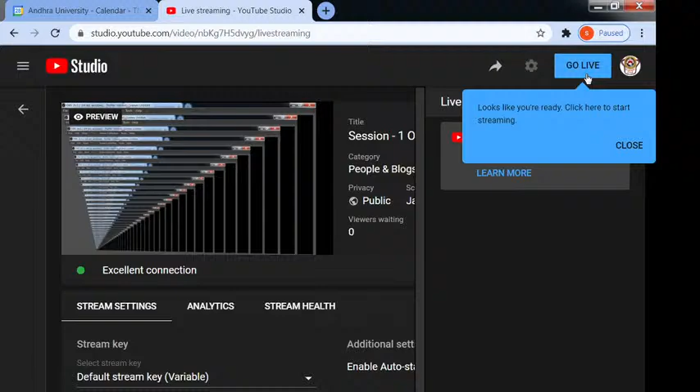They are expressing their happiness and requesting you to go at the same pace, sir. They are able to follow. Okay, fine then, thank you. That's the most important. Good, sir, I'll stop presenting so that you can share your slides.

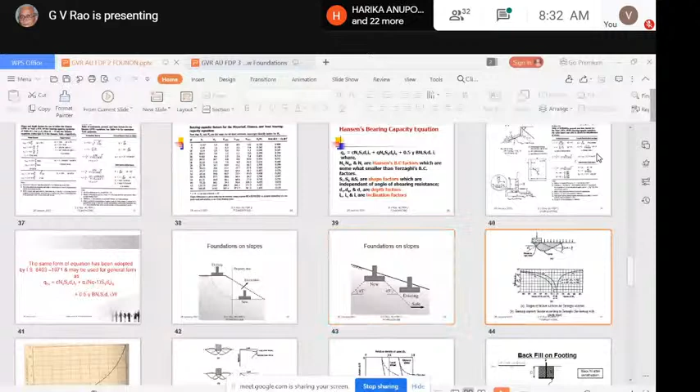Are you able to see my screen? Yes sir, it is visible. Okay fine. So tell me when to start. I'm ready. Maybe 30 are there, sir, we wait for another 3-4 minutes and then we'll start. Yeah, that's fine, okay.

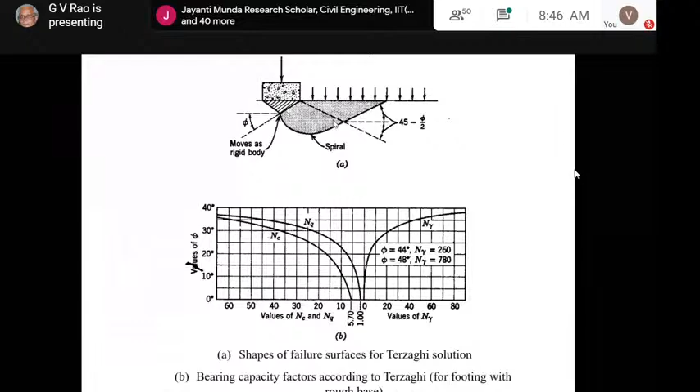He has also used an inclination for both these lines, the linear part defined at 45 minus phi by 2, because that is the way the failure planes behave in passive condition. This is a passive wedge. So that's why both these lines are defined as 45 minus phi by 2, and this is assumed as parallel.

We also got solutions for a rough foundation and a smooth foundation. Now, by basic work, the rough foundation gives more bearing capacity, while a smooth foundation gives slightly less bearing capacity. Once you get the result in Terzaghi's standard format, this is the original form, of course.

What is most important for us is the change in values of N gamma, N Q, and N C. In the beginning, up till about 15 or 20 degrees, which are not realistic, very loose conditions apply. But if you go around 30 degrees angle of friction, we see it almost goes up so high. The difference between angles becomes very small, but the increase factor becomes tremendous.

That is most important: assessment of the foundation subsoil condition has to be very precise, because between 29, 30, 31, and 32 degrees, there is so much difference in the N gamma factor. You can see it moving up sharply. And this is only up to 40 degrees on the curves.

For example, at phi equal to 44 degrees, N gamma is 260, and at phi equal to 48 degrees, N gamma is 780. Just a mere change of 4 degrees gives more than double, 3 times the value. So that is the kind of appreciation we need in getting the correct assessment of the foundation subsoil conditions.

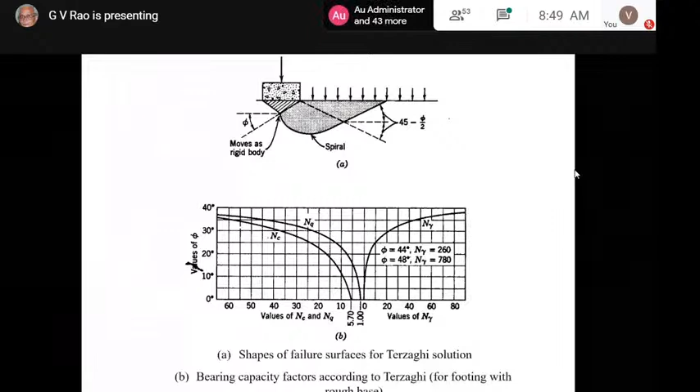That's why I thought I would emphasize it now. The other important factor, which will come to mind by common sense and will be used later, also comes out of Terzaghi's interpretation. I don't know how many books give it, but I picked it up from my old copy of Leonard's Foundation Engineering.

So on this horizontal axis we have the value of angle of friction phi, and on the vertical axis we have depth over B, depth of the foundation over the width of the foundation. What we're finding is that the zone of influence is going to be up till B only for 30 degrees angle of friction.

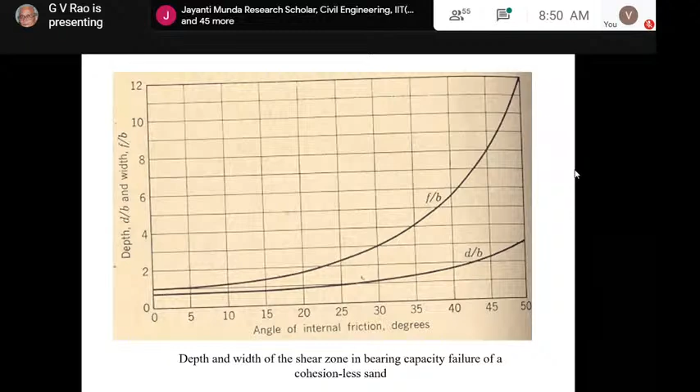And if the angle is going to be more, naturally it's going to increase. With the depth or D over B increasing more, this value is going up to 2. At 45 degrees it's becoming 2. That means the depth of the influence zone is becoming larger and larger for higher angle of friction.

That's why we consider influence zone for capacity calculations. That zone of influence comes from this basic theory. It could vary - for 30 degrees angle, sand, we can say about 1.5, 1.2 or something like that. It's actually moving to higher angles like this, up till 2.5.

So this value is about 2.5 roughly. That is the zone of influence which we get directly from this theory. It is, I should say, easier for us to comprehend this than getting the total Boussinesq bulb and things like that, because this shows you what is happening near the surface.

The other point is what is the width of this zone. If you recall my previous picture, it shows you that F is the value of the upheaval of the foundation soil onto the ground. So that width is taken as F from each side - one side F and other side another F. So 2F is the zone of influence totally.

For example, for 30 degrees, the zone of influence is, let's say, 3. That means the zone of soil participating in load transmission through the passive wedge, or passive zone, is about 3 times the width. And this moves further, going up and up. So the more the angle of friction, the more soil participates, that's why the bearing capacity increases.

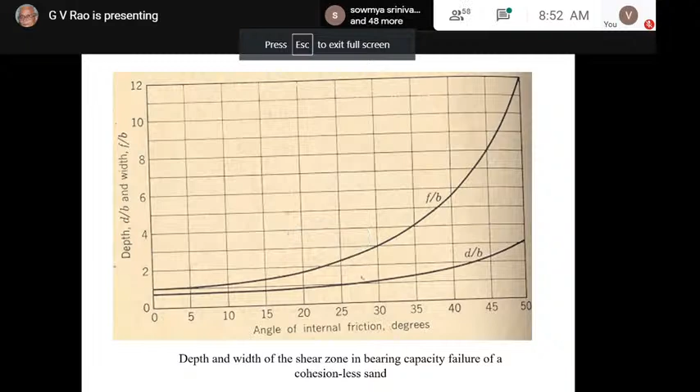Tomorrow, when we talk of improvement of the ground, this is the zone we are always considering. So both in terms of width and depth, higher the angle, more the zone of influence. More zone of influence means that much soil is participating in the load carrying capacity. In fact, we use it extensively in pavements also - when you put geosynthetics in pavements, we understand the importance of this very clearly. So for shallow foundations, one ought to know this zone of influence. Okay, this defines the zone of influence from a depth and width viewpoint.

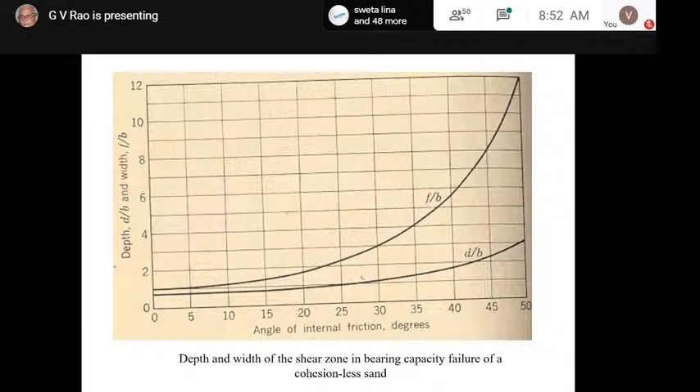So the other thing I didn't show you earlier, in terms of basics, we initially defined local shear failure, general shear failure, and the load deformation curves, load settlement curves, like a plate load test. When you have general shear failure, we've already seen the entire zone is influenced. The width is what we're talking of here, and the depth we're talking of this. So we are likely to get something like this - the plate test values will be definitely quite steep, and then maybe it will fail or go down slightly.

And if you take only local shear, you can see this. Last time I showed you a picture wherein there is a dotted line here, dotted line here. Now here everything is a dotted line. That means it's not going to form fully, but it will show some tendency.

That is local shear failure, in which the soil just below the foundation participates in the load bearing. The zone of influence becomes lesser because it's punching down, going down only without really moving the soil by the wedge on either side. It does not allow us to fully form the passive wedge, which would be the zone of influence or shear zone.

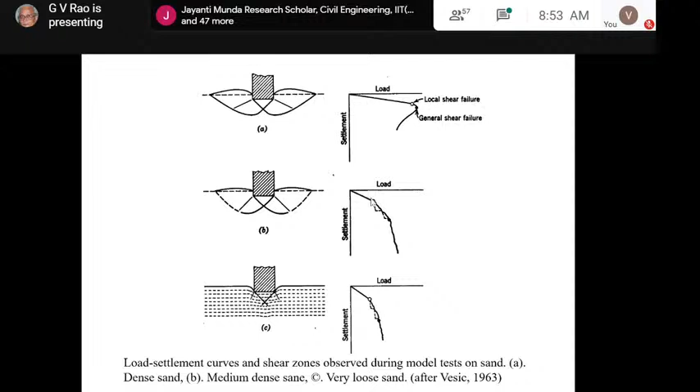Another way to look at it: the foundation will simply go down completely. It may partially form the wedge, but it's simply going down now. That means no soil around is going to be influenced, or very little influence. Only the soil just below the foundation is going to be affected.

When the zone of influence is less, when the soil adjacent to the foundation and deeper is not influenced, what's going to happen? The curve is going to get steeper, meaning failure is very imminent very quickly. This is what we call punching shear.

For most of our conditions, we combine both punching and local shear, since sometimes it's very difficult to distinguish them. So for our purposes, we combine these. Vesic himself has defined where we should take local, where general, and where punching shear.

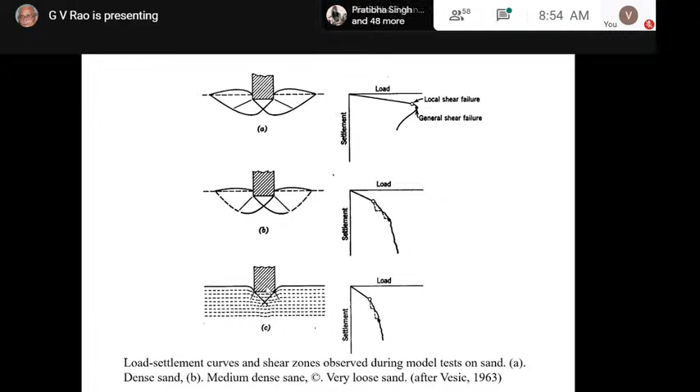His way of looking at it is: when you have the relative density of sand somewhere between 0.7 to 1, that is very dense sand, and considering the depth of foundation influence already mentioned, this applies to a long rectangular foundation, something like a strip footing.

Coming down to around 0.35 relative density, this is going to apply to rectangular foundations. For circular foundations, the difference is shown by a dotted line. So above this line is general shear failure, between these curves is local shear failure, and below this is punching shear failure.

These values are also used indirectly in the IS code in specifying how to handle local shear, because in the IS code we are not doing punching shear separately. In fact, quite a few researchers combine local and punching shear.

The point we're trying to make is these two curves are defined, and even the values are used in our equations for the IS code. Indirectly they don't state this, but the tabular form I'm going to show today will tell you that between this range of density for sand, we have to use the local or general shear failure.

If the values are low, we use local shear failure. If the relative density values are somewhere in between, we interpolate. This is coming from this basic data provided by Bowles as well as work from 1963.

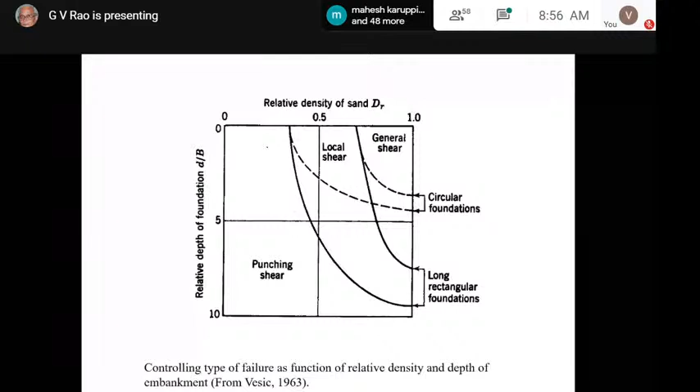I have already shown you this, but the picture wasn't clear last time, so I put a better slide, worth going through. Terzaghi's case, as Bowles recommends, is best for very cohesive soils where D by B is less than or equal to 1, or for a quick estimate of Q ultimate.

Mind you, it's a quick estimate of Q ultimate to compare with other methods. Do not use it for footings with moments, under horizontal forces, or for tilted bases or sloping ground. That means the original equation by Terzaghi, though corrections are available. For example, with an inclined load, we take the vertical part for bearing capacity, and for the horizontal part, we assume the whole foundation moves, with passive pressure on one side and active pressure on the other.

The difference between these two takes care of the horizontal force, the horizontal thrust. So we can always modify the basic equation, but he recommends not using this basic equation beyond a quick estimate. It just tells us the basic story. Then a lot of work has been done by Hansen, Meyerhof, and Vesic.

We know that we can apply these series for any situation that applies depending upon user preference or familiarity with a particular method. That means if you continuously believe in something, or have particular experience on certain things, then we can use any one of them.

Obviously, when the base is tilted, when the footing is on a slope, only Hansen and Vesic give you that. Hansen has given extensive deliberations on the factors, shape, depth and inclination factors. He has also given us, for ready use, the simplified factors of Hansen, which we are using today in our code. So this is something we have to keep in mind.

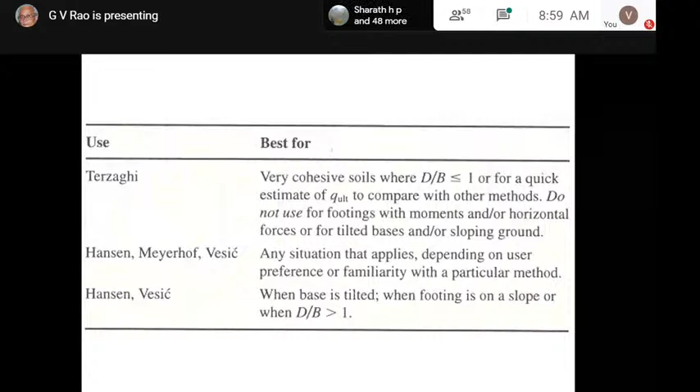So what I wanted to tell you is that there is a range of these foundation values of depth, width, and length, and there is a range of gamma, phi, and C within the limits. What they found experimentally is the ultimate bearing capacity values in terms of kilogram per centimeter square. These values are given here, and the values by Muhs are given here. Bowles, in fact, modified these equations using his computer program in those days. Today, all of you can do it more easily by using any kind of software.

So what he did was compare what prediction comes for these parameters by Terzaghi, by Meyerhof, by Hansen, by Vesic, and Balla — another theory which is also used by some researchers and practitioners. So he compared 5 methods with the model test values.

So now what are we going to get? Suppose I take this, 10.8 kg per cm square is the actual measured value, and the predicted values are 9.4, 8.2, 7.2, 8.1, 14. In the other case also it is varying very widely. So none of them are comparing well with this.

So what did he finally say? It's not seen very clearly here, but if we go back to the table, we find that out of the 8 tests, 4 of them are very clearly somewhat near Terzaghi — that means 4 measured values are somewhere near Terzaghi. 2 values are near Hansen, and 1 each for Vesic and Balla. So what are we going to say? By statistics we'd say Terzaghi is better, or Hansen is bad.

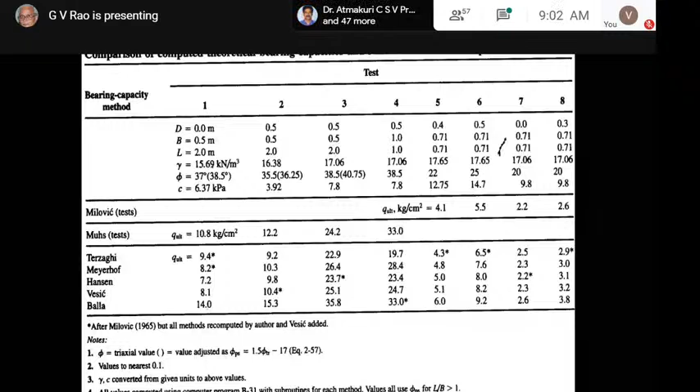So with this background which I've given you, comparing the results with the help of Bowles' book, we will go to IS 6403, which is our bible for carrying out the estimation of bearing capacity. And what we should also remember is the reasons which went into the development of this code, which has been revised slightly here and there.

When one practices, we have to go as per the codal provisions, whether national or international, depending upon the nature and magnitude of the work. We can always use experience, but we have to go through the provisions. For a large project, if the provisions are not being methodically followed, we should quickly realize why we are not necessarily following it.

For example, for foundations on black cotton soils, we may not be able to follow the code, and we'll have to use some other theories. Also, experience of certain kinds of foundations in certain situations may differ from this, and that is also permitted by the code. I think I have read this earlier to you, but it's better to recap.

I hope by now you would have downloaded IS 6403, which is freely downloadable from the BIS site. What did the code say in the beginning itself, which normally people don't read? That's why I thought I would read it aloud: the bearing capacity of foundations is needed for dimensioning the foundation for any structure. Several methods are available for determination of bearing capacity of shallow foundations, and this standard gives some of the methods which are commonly used for the purpose.

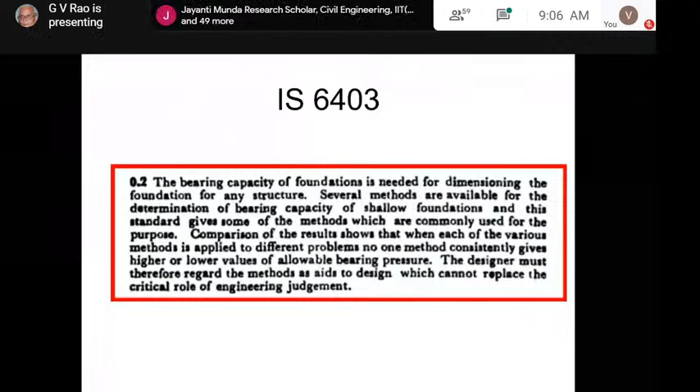The other last point before we go ahead is about the utility of the plate load test. I have deliberately avoided considering the plate load test because of plate limitations. The plate size is very small compared to actual foundations, so the depth of influence is not affected properly; it gives a small depth of influence.

It cannot undertake the effect of the water table, and it cannot really consider the large depths which will be there. For example, if I want to use the plate load test value for a wide foundation, the values are entirely inapplicable. So all the results coming out of the plate load test are, normally, what you'd say, outdated. We depend upon SPT and DCPT for testing rather than the way we do the plate load test. So it is more or less outdated, and we do it only in very rare circumstances.

One other reason people have been doing it is that designers, particularly when they use STAAD, expect a modulus value also. This modulus value is given as a correlation between the SPT N value and the modulus, and this table is provided by Bowles. I'm not saying we should always depend only upon Bowles; it gives an indicative value, and by your own judgment you can refer to other references and correct it also. But that is what a practicing engineer who wrote a book gives us.

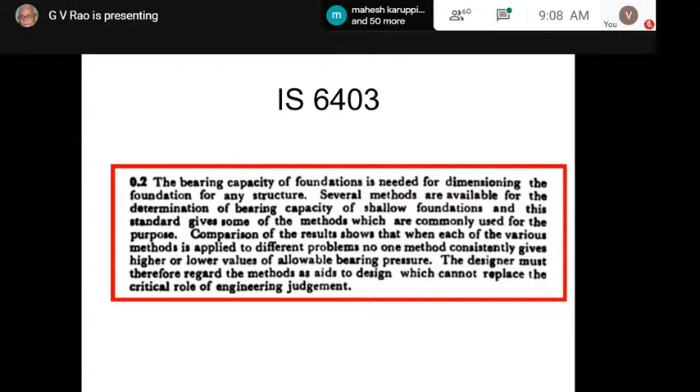So with that starting point, the code actually gives us different steps for doing it. I will quickly summarize them, and all these are extracted from the code itself so that we don't get confused with the wording. We are divided into two steps: one is cohesionless soils, and another is cohesive soils. So one is soils with cohesion and angular friction resistance.

The other kind is if you are conducting a test on compacted soil, on which we don't normally build buildings—this is also going to be incorrect because it's unsaturated soil. So in the first case, it was saturated soil that we converted, by our carelessness, into unsaturated soil—it got desiccated, and so all the problems keep coming up.

Then when is the soil really going to get these values? It's obviously only for an over-consolidated soil. Today we'll also see exactly what over-consolidated soil means.

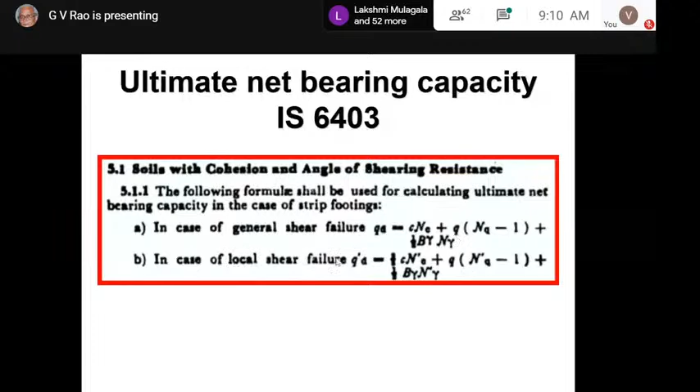It refers to the table, and the table gives us these values. Strictly speaking, I don't know where they picked up these values, but anyway this is what is given by the code. We will follow these values. For phi equal to 30, it is 30.14, 18.4, and 22.4, and at 35 it becomes 46, double this value, and here also almost double. So what you find is that the change in the bearing capacity factors is so humongous when you increase the values of phi.

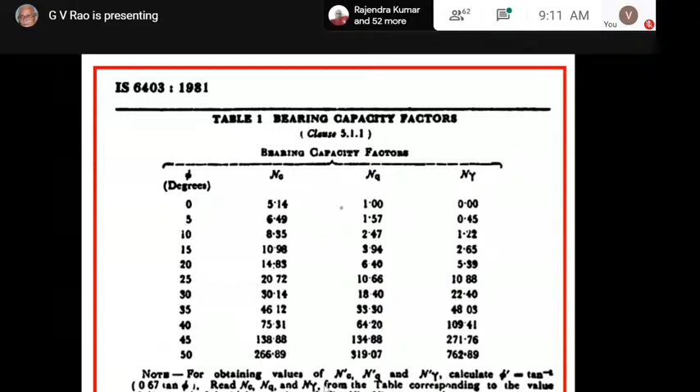That means our testing has to be nearly perfect. For understanding local shear conditions, as we already mentioned, the modified value of phi we are going to take will be tan inverse of 2/3 tan phi, and as usual we are going to use 2/3 of C also in that equation. So that is the basis initially specified by the code.

Then they say that was for strip footing, though it doesn't say that explicitly. Now for this, we are going to modify for shape, inclination, and depth of embedment. Mind you, these are terms used by others, particularly Hansen, and this is also implied in discussions on the basic bearing capacity equation.

So the shape of the footing, inclination of the loading, and depth of embedment are the factors I have to mention now - factors of shape, depth, and inclination for the C component, and again for the surcharge component we get SQ, DQ, and IQ, and for the B gamma component also we get shape factors and inclination factors - S gamma, D gamma, I gamma - and local shear values in the same way.

I think I have already focused attention on this, but it's worth really looking at the application of the same equation in many different ways. What are the different ways? We know that the bearing factors NC, N gamma, and NQ are functions of phi only. The theory could differ in choosing the shape of the shear zone and whether this is going to go into such a zone or not. These are all there, but each theory gives us basically the bearing factors NC, N gamma, and NQ. So that means the phi value is going to be very important.

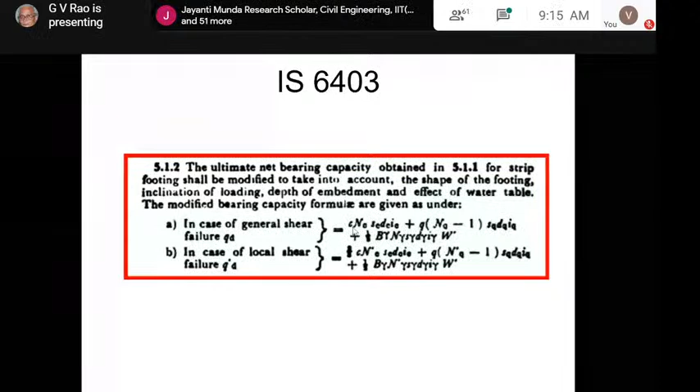We should give an assignment to our students: what is the influence of C and phi on the bearing capacity values we get? What is the influence of water table changing from top to bottom? Tomorrow we'll also see the influence of water table change in terms of settlement or consolidation.

We're also going to see the influence of gamma, as we already said, on effective unit weight and submerged unit weight, and the effect of other things like depth of foundation and width of foundation. We need to find which factor influences most for a given situation. This kind of assessment can be done through students to let them understand what is most critical.

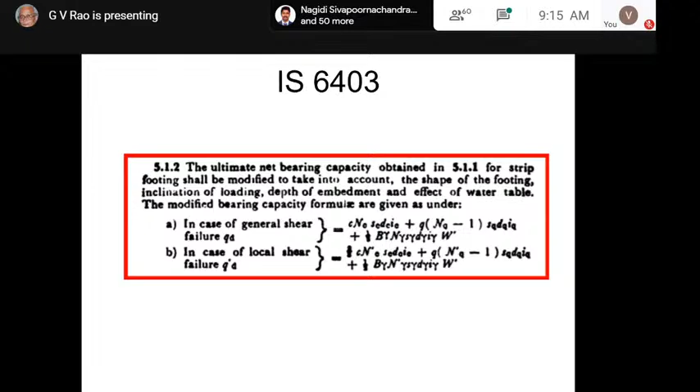Shape factors are given for strip footing, rectangular footing, square footing, and circular footing. B is diameter in the bearing capacity formula, meaning it represents the total width. So shape factors are given here: SC, SQ, and S gamma.

For all four shapes, the shape factors are given, and depth factors are also given. These depth factors are taken again for cohesion, for surcharge, and for the basic gamma function, an integrated kind of function.

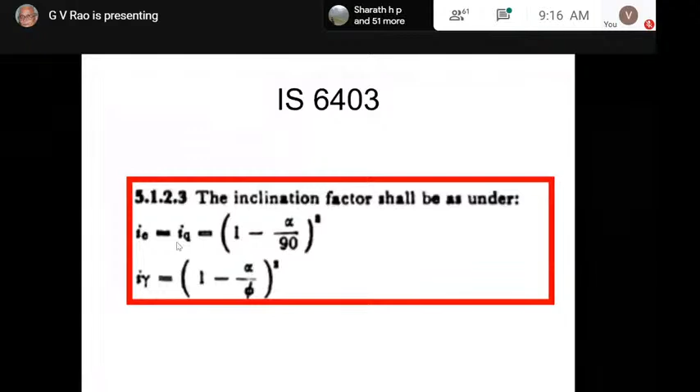Then we have inclination factors defined. Two of these factors are the same; only I gamma is different. IC and IQ are really the same. By and large, they are functions of phi only — that's something we must always keep in mind. They are functions of phi, or in the case of shape factors, functions of B over L.

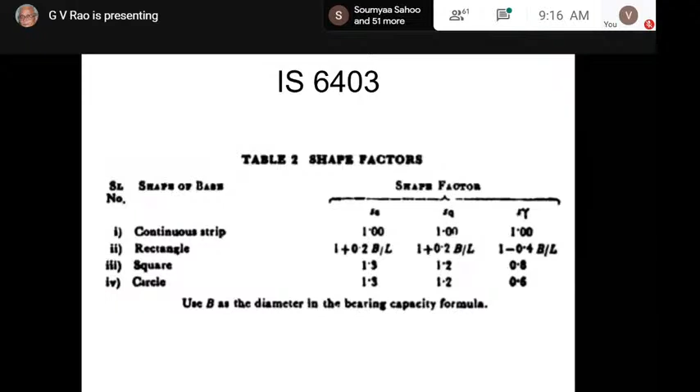That is what we have to see. B is breadth or width, and L is the length of the foundation. So we are always playing with these values of the fundamental foundation parameters which we choose.

So the determination of capacity is an iterative process. Nobody says in an assignment to simply calculate bearing capacity for a given width and depth — it's not like that. We have to choose the parameters and then proceed. We determine the most convenient depth and the most convenient or economical width.

If you choose a shallow foundation with a smaller depth, the width could become very large, so foundations might nearly touch each other, or if not calculated properly, they may even overlap on paper. This means the determination depends on the column spacing we have, or placement of intersecting structures like a wall foundation. So it's ultimately an iterative process to get the result.

Like other properties, these are not unique — it depends on the conditions. The so-called bearing capacity values are not unique in that sense; they are specific to the depth and foundation. We don't even know how recommendations are made in many geotechnical reports — they just calculate one value, assume some parameters, and do it. That leads to confusion.

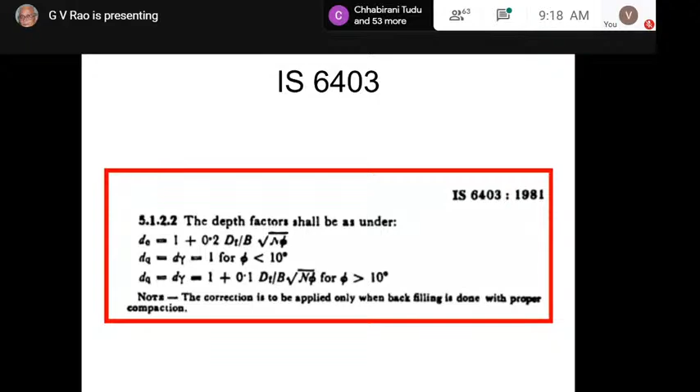Now for less than 20% relative density, the void ratio is going to be more than 0.75, the condition of the soil is loose, and then it's local shear. As I said, local shear and punching shear are put together here.

So very clearly, for relative density more than 70%, or void ratio less than 0.55, the methodology you pick up is general shear. And for less than 20% relative density, which really isn't going to happen most of the time, with void ratio greater than 0.75, it is taken as loose condition and we will have local shear failure.

If the values of relative density are going to be between 20 and 70%, or the void ratio is going to be between 0.55 and 0.75, we take it as medium condition and then we have to interpolate. That means we take the extreme values and linearly interpolate, not extrapolate.

Now this is something we have been doing anyway, but the point I want to mention is we have to get the correct relative density for this. We determine this value, but it's not so easy to determine because we are going to put in some expected values to begin with, and that itself is highly questionable.

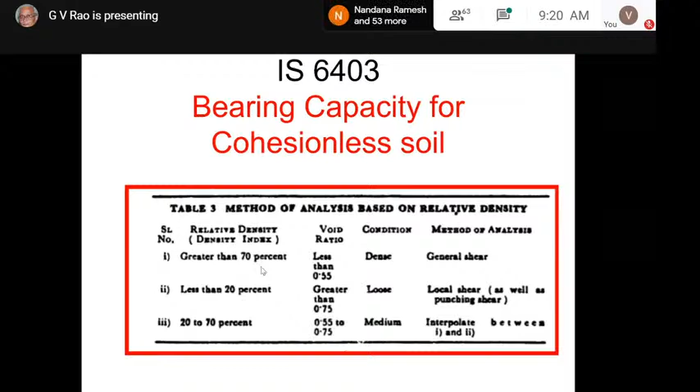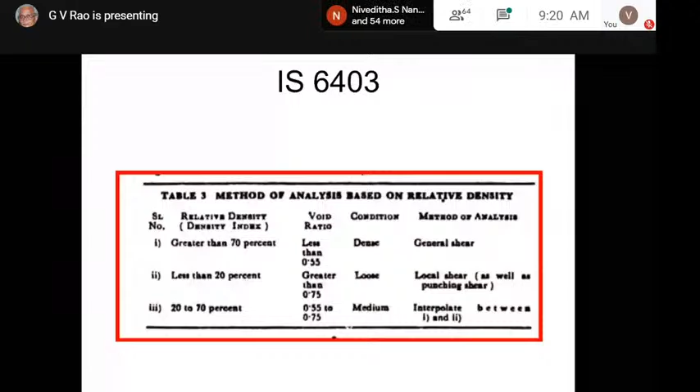So that is what we will say for this one. Based upon that, first we get the value of relative density and everything else, and we get the values of void ratio.

Now he says directly we can use the SPT itself. So for the SPT, obviously the governing equation is not going to be inclusive of the C parameter, because this question involves absolutely no cohesion at all.

But we should also consider what was mentioned earlier. If you read this, the SPT shall be determined at every 75 centimeters in the vertical direction, and of course a change of strata also, if it occurs earlier than that.

So we consider the average value beneath each point shall be determined between the level of the base of the footing and a depth equal to 1.5 to 2 times the width. I've shown you how the F value and the depth of influence work out, and from all that, they surmise the depth of influence is going to be 1.5 to 2 times.

So we consider an assumed value of the foundation width, and below that, 1.5 to 2 times that width as the effective zone of influence.

These SPT or N values are taken as individual values, and if an individual value is more than 50% greater than the average, it shall be neglected. That means any value which is higher, we neglect it, but lower values we don't neglect.

In fact, I do this at every horizontal level. We have a number of boreholes on a given profile, and I first draw a horizontal line at a given depth. I find out what is the least and what is the highest, and find an average of that, then go to the next depth. This isn't done for only one borehole, because we can't take a decision on one borehole alone. We need a number of boreholes, draw typical cross sections or profiles, and from that profile assume a horizontal plane.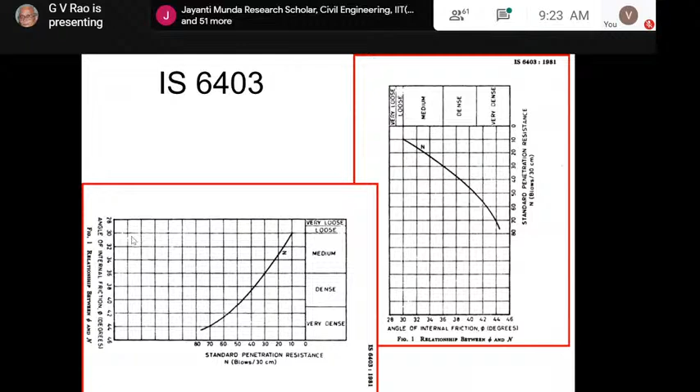For very loose soil, at the beginning of medium soil, the angle is 30 degrees. What is the SPT value at that time? It's 10 only - SPT 10 gives you 30 degrees. SPT 30, let's say, gives us an angle of 36. That is the correlation they have maintained, and this is what I have followed using this code.

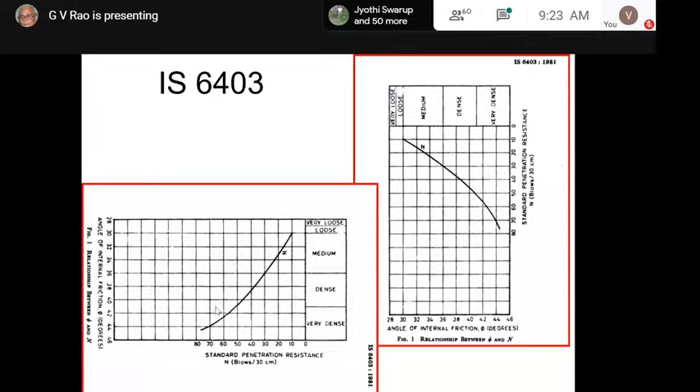So we have the earlier relative density, if you're able to get it, and we also thought of comparing with the void ratio values. Now we're able to use the N value directly, and from that the chart gives you the angle of friction, and from that we do the calculations exactly the same way as in a standard approach. So then we got for cohesive soils.

For cohesive soils it's very simple anyway - we got only one parameter. We know it's undrained values, mind you, the net ultimate bearing capacity immediately after construction on fairly saturated homogeneous cohesive soils shall be calculated from the following formula.

That's going to be C, and C anyway is there, and then the factors for shape, depth, and inclination are there as well. I've mentioned also some people take NC as 5.14, Terzaghi, and then others take 5.7, some take 5.9. But anyway, it's a very low value of NC which you're going to take the correction from.

If it's going to be on a clay which is saturated - not just fairly, but saturated - then we do the undrained test, and we use the C value, and the rest remains the same. So NC is the only thing. NC is again constant for this particular method, but then we're going to see for layered soils what we're going to do.

This equation is meant for fairly saturated material. Now, once you place the foundation, naturally it's going to stay there with the loading - at least most of the loading, the building load which is permanent and semi-permanent. We know how to take the loads for design of structures, so that load is now permanent, and we'll calculate settlement later.

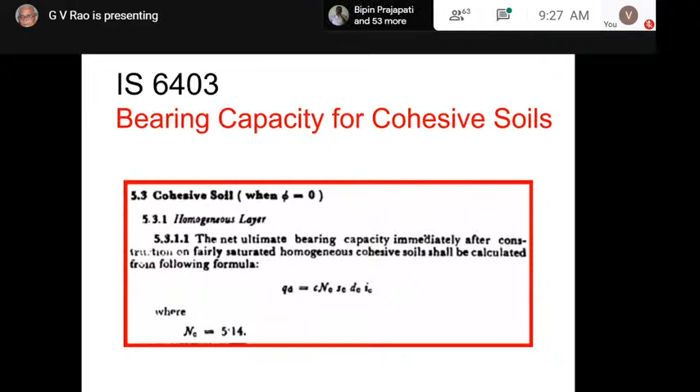The second thing he mentioned very clearly is that we have to consider the values from UCS. We already mentioned how to get the C value, and the factors—shape, depth, and inclination—are obtained from the table, as I already shown you. And then we have the shear strength for a depth of 2/3 B beneath the foundation, which does not depart from the average by more than 50%.

That means we are considering the depth of influence as 2/3 B only. And if we have got a number of values, we are going to look at the average of that. If no single value deviates by more than 50% from the average, naturally we will have to use the average. If it is not so, we will have to consider it as a layered material.

So they give us a solution for a two-layer solution, which you will see very clearly. The point we are trying to say is that we will have to do a number of tests. What do you mean by foundation does not depart from the average by more than 50%? We are considering 2/3 B. In a depth of 2/3 B, we are going to have a number of points. How many points are we going to have actually?

We are trying to say that we are doing SPT at every 0.75 meters. And once we finish one test, we are going to naturally make the borehole deeper by another 75 centimeters. And before that, as I mentioned earlier right in the beginning, we need to take undisturbed samples. So a number of undisturbed samples are taken, and collection and testing of them has to be done to be able to get these values.

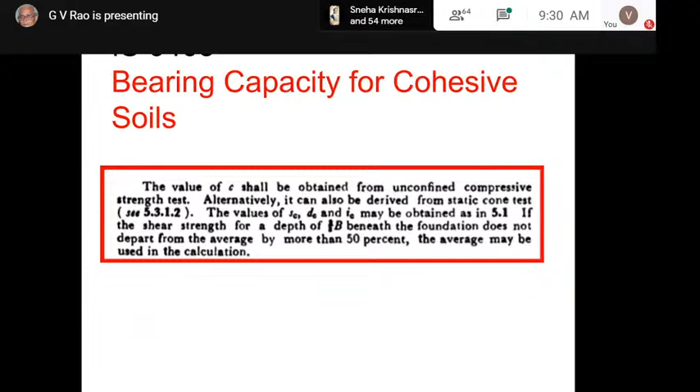That's number one. So then if occasion demands, we may also consider the two-layer system. A multi-layer system we can't do in this code—we can only do that by FEM or some other methods. But here we are considering only two layers, as C1 and C2. That means the top soil has a C1 value, and the bottom soil has C2. Only two layered, and we are assuming that these two layers are going to rest ultimately on a stiffer soil.

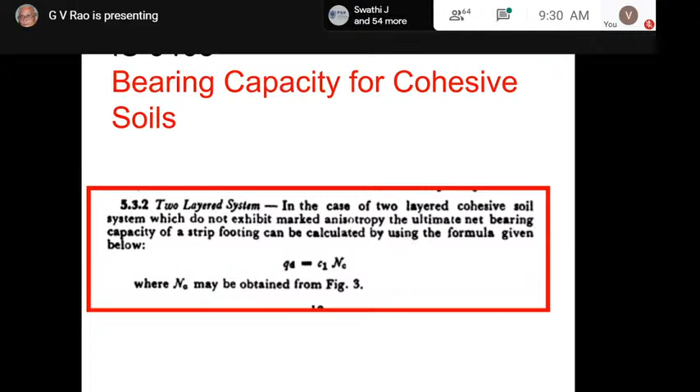So for this, this particular code gives us basically a chart, if I believe strongly, developed by Professor Reddy, A. Siva Reddy, and Professor Raja Srinivasan. This chart was also given in the earlier editions of the code, but now I find that it's not there.

But anyway, they adopted that from Reddy and Srinivasan's work for two-layered soils. The only thing we have to remember, which is also mentioned in the amendment, is that this factor is not C1 by C2, it's actually C2 by C1. Please note it now.

So what we are trying to say is that, depending upon the kind of soil we have, one is going to be stronger. For example, if C2 by C1 is less than 1, what does it mean? It means C1 is stronger.

C1 is higher, so the value of Nc we are going to use is going to be less than 5.14. On the other way around, when it exceeds, it's going to be higher, but mind you, this limit is again around 9 or 10 only. So the change is always between 5.14 and higher, and that is how this thin or thick soft soil in the two layers is going to influence the overall behavior.

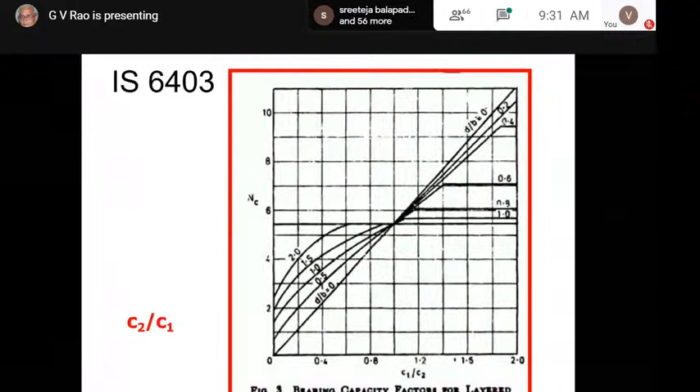So then, of course, eccentricity can be considered. How to consider eccentricity is not mentioned in the earlier codes, but this is standard practice we do in our structures also. Eccentricity can be one-way or two-way.

If you talk of eccentricity from the length direction, the effective length is going to be considered. That means from the point of application of the load, from the center of gravity, naturally that distance is taken as eL, which is eccentricity in the longitudinal direction.

So L minus 2eL is going to be the effective length of the foundation for bearing capacity. Width also in the same way, eccentricity in the width direction is considered, B minus 2eB. So instead of using B in the equation for bearing capacity, we now use B prime. In the area calculation, remember we use both corrected L and corrected B, which will influence the total load bearing capacity of the foundation based on the equation.

So what are we trying to say? The actual width and length of the foundation is L and B. For calculation purposes of bearing capacity, we use the reduced or corrected width, corrected by twice the eccentricity, and length also corrected by twice the eccentricity. The total area is corrected as the corrected length multiplied by the corrected width. This reduces the effectivity of everything.

This comes into the picture particularly for eccentric loads, and also sometimes when we have structures abutting neighboring structures, where the column foundation is going to be just touching the property line. In those cases it comes into play, but it's not very common because we'd spend more money constructing the full length and full width of the foundation, which is actually a waste in terms of contact. So we have to take this into account also.

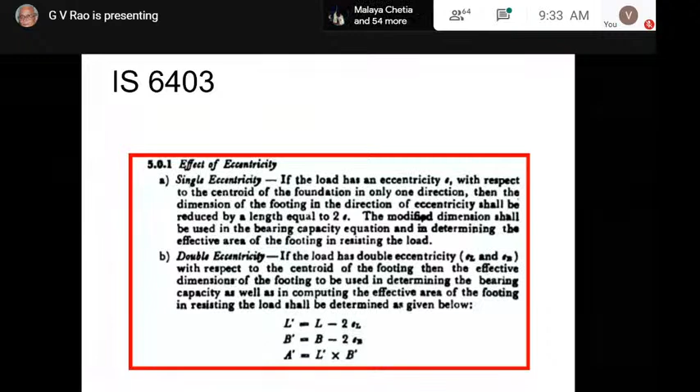This is mentioned right in the beginning of this code. So I'm referring back to the beginning of the code, where the definitions are given: net loading intensity, ultimate bearing capacity, safe bearing capacity, safe bearing pressure or net soil pressure for specified settlement, and allowable bearing capacity.

So if you look at the terminology, allowable bearing capacity means the net intensity of loading which the foundation will carry without undergoing settlement in excess of the permissible value for the structure under consideration, but not exceeding the net safe bearing capacity. So what is it trying to do?

One criterion is that it will not exceed the net safe bearing capacity, and also that it will not settle more than the permissible value. We said it's probably better to use the word 'pressure' because 'capacity' causes confusion, since people often conflate bearing capacity with safe and allowable bearing capacity as if they mean the same thing. So in our terminology, we use the term allowable soil pressure to avoid this confusion.

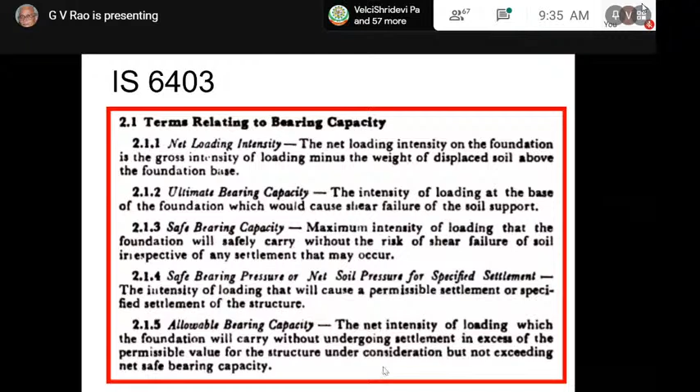Though the terminology is confusing, the important point is that before giving a recommendation on the load bearing capacity of a foundation, for a given width and depth, the load it can carry is given by the term allowable bearing pressure. We should also check how a given engineer defined these values, whether he followed the IS code terminology or not.

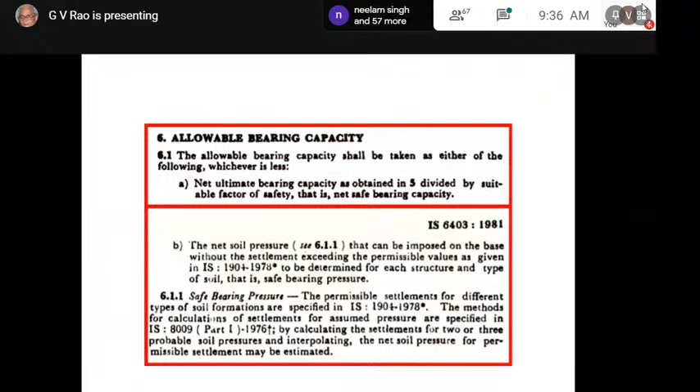We are considering that the next phase of foundation design from the soil viewpoint involves both these factors, which brings us to the most important aspect: settlement. Any load on soil will definitely cause settlement. Sometimes settlement is instantaneous, sometimes it occurs partly immediately and partly takes time for the total settlement to occur.

If we look at the total behavior for sand, sometimes settlement continues, though sand is generally strong so bearing capacity problems don't usually arise. Even if it's loose, the moment you construct the foundation, settlement occurs. If settlement happens during construction, we're happy, because then we're not worried so much about it.

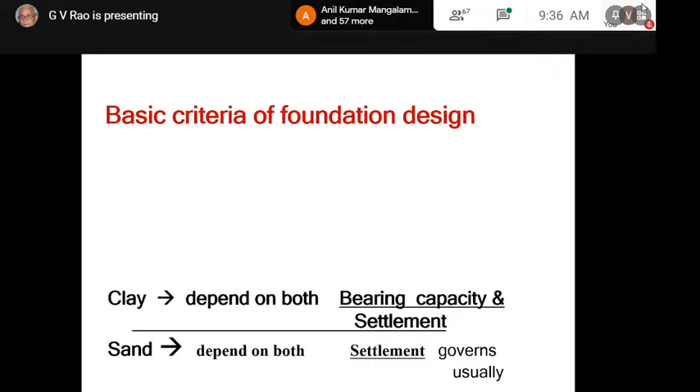There are many theories for this; we mainly use elastic theories, and the settlement code tells us how to calculate it. But people don't give much importance to this unless the soil is very loose sand, or for very important structures like nuclear structures. Otherwise, we tend to ignore it.

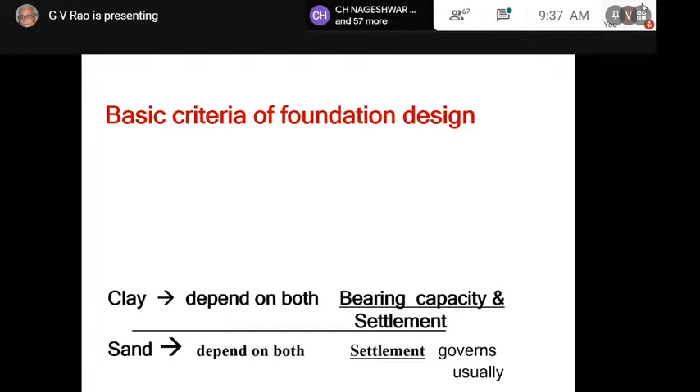For clay soils, it depends on both bearing capacity and settlement, and we won't say it's governed only by bearing capacity or only by settlement, because both are equally critical. So the basic criteria are: we need sufficient factor of safety, no excess settlement, and no excessive differential settlement. It should be under control.

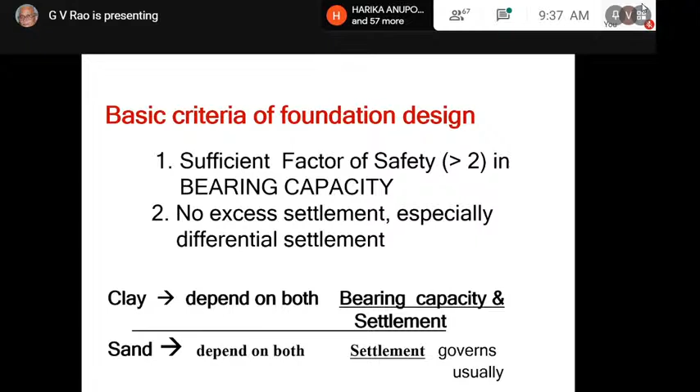So what are we going to say? We are going to consider not only the total settlement of the structure or foundation, but also the differential settlement between adjacent footings or foundations. We have to look into both these aspects. That is the criteria, and we'll come to the aspect of settlement in the next step.

So I'm calling this assessment of settlement. Assessment of settlement sometimes looks very easy and sometimes really complicated. If you read the smaller books written by Simons and Menzies from Imperial College, you'll get confused, because they give data showing that settlement calculated by any method can be off by more than 100%, maybe 200%, either above or below the calculated value by the best methods.

So sometimes we might finally ask, why are we bothered about settlement at all? That is also what we are going to discuss in detail.

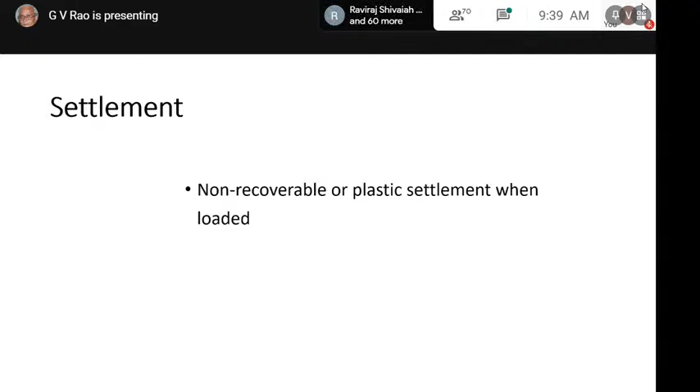In case of critical structures, we will have to also monitor the settlement. That becomes equally important. When we talk of settlement, we are talking of settlement which is non-recoverable, since the structure is going to be there. The settlement could be plastic or otherwise, but it's non-recoverable. Then the other settlement is for saturated soils, and that is time dependent. These are the two things to keep in mind, and sometimes we do things without realizing the importance of this.

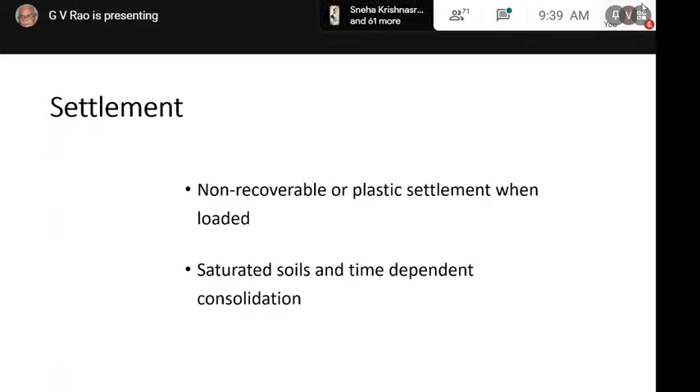This is clearly shown by a funny thing mentioned in our famous book by Lambe and Whitman. For the Tower of Pisa, the field engineers in those days said, I skimped a little bit on the foundation, but no one will ever know the difference, because the foundation structure is not visible to anybody, only the superstructure is visible. So unfortunately nobody did anything, but the kind of soils below this leaning tower were something they didn't anticipate, so the tilt occurred. We can't say I reduced the width or the depth and did something small - finally it will show up on the main structure, and if it shows up there, it's very difficult and expensive to rectify.

If you read the literature, so much is available on the leaning tower of Pisa - the history, what kind of soils, how many commissions studied it. Very interesting data is freely downloadable on the internet, we should see that. So what we look at is not only the tilt which happened - if the tilt increases, the structure becomes unstable - we also look at the total settlement, and naturally any small tilt is also going to cause cracks.

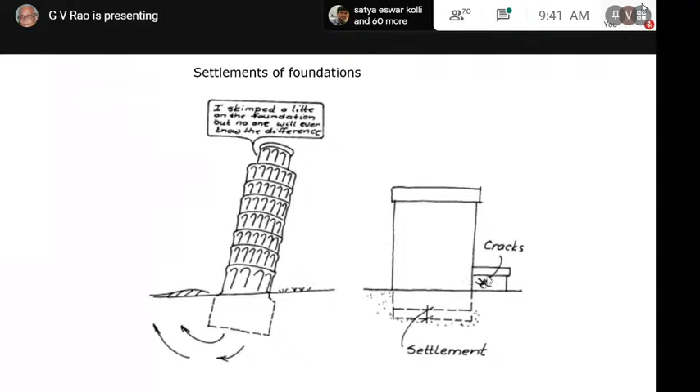We will see the typical structures - this is the same Tower of Pisa, and then this is the Palace of Fine Arts, which we'll discuss towards the end of the presentation, not today, maybe next time. We'll see that this is one structure which settled by more than 4.5 meters in 100 years. If you look at the total structure, nothing happened to it - the structure is intact, it was simply settling continuously every year.

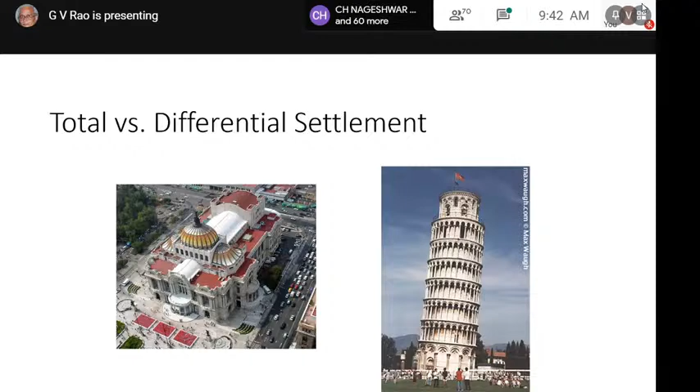The Palace of Fine Arts, one of the fantastic structures built in Mexico, was designed in 1904 and probably finished in 1930 due to various situations. Even now it's worth seeing - most historical structures, paintings and other things are there, a real tourist spot. But this has got a facade which we'll see again at the end - the entire facade has gone down by one floor, basically 4.5 meters. So where do they take the cables, water line connections, sewer connections now? Earlier people were walking up to the porch, now they are walking down to get to the porch - can you imagine that? We'll talk more on this at the end.

So what we give importance to is not necessarily the initial elastic or immediate settlement - we talk of the time rate at which settlement occurs, because of consolidation. Consolidation causes settlement. Consolidation in saturated low permeability soils under external loading is about building up the effective vertical stress by dissipating the initial excess water pressure in the soil through drainage. Once you load the soil by constructing a foundation, it will develop excess pore water pressures. These pore pressures are slowly dissipated depending on drainage conditions available, and that will increase the effective vertical stress, by which process the strength also improves.

So in a way it is good, but it's going to take time now. It depends on the load, on the permanence of the load, and we also require drainage conditions - the drainage capacity, the permeability of the soil. Where the water is going to go, where the excess pressure is going to be dissipated, we require a drainage layer. So whatever excess load we have applied by the foundation now has to become effective - that's the time taken for this. The excess pressure dissipates, becomes zero, and the entire vertical stress becomes effective stress. That is the basis now. It is good for us, but it causes its own issues.

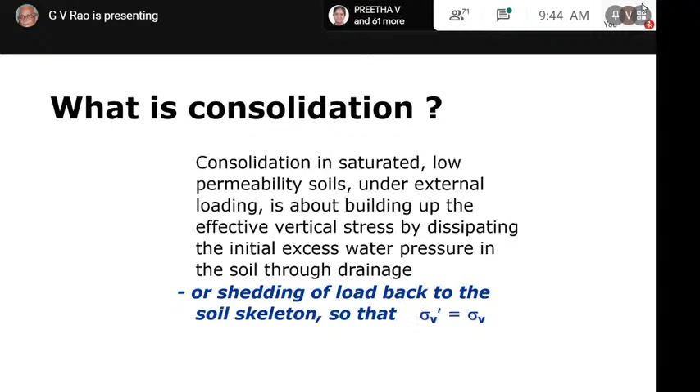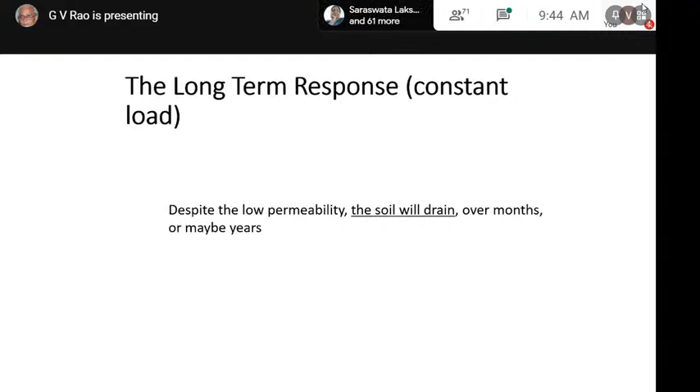So it is a long-term response. As I said, this particular structure in Mexico has been settling for 100 years. In fact, many structures, the entire city keeps settling because of the kind of soil they have there. The soil will drain over months, maybe years, maybe decades, maybe centuries. What is causing this? It is causing a reduction in the void ratio, and of course causing settlement because of this.

And the most important point is that the amount of water which is going to get out - the total quantum, the volume of water which gets out - is going to equal the change in volume of the soil. This is what we must always remember because we are dealing with saturated soil. If X amount of water gets out, that much volume change occurs in the soil. That's why the void ratio changes, that's why the effective stress increases, that's why the strength increases.

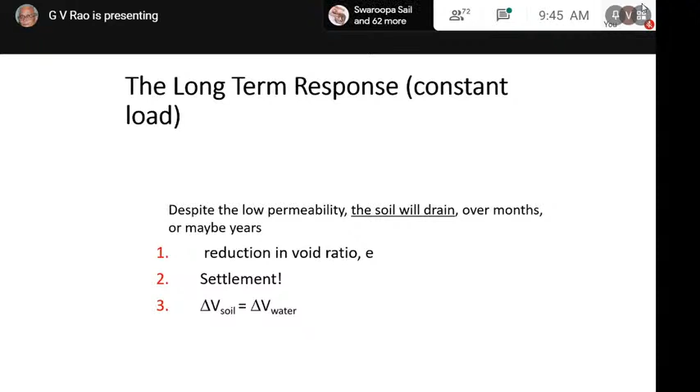So for this consolidation, 1D consolidation, for such a simple situation, we are looking only at the volume of water. We are going to define this in this case. How do we mean 1D consolidation? That means consolidation occurring only in one direction. If you remember Terzaghi's theory, one of the main assumptions is that it is one-dimensional consolidation - that means the flow is in one direction only.

And the settlement also in one direction only. But if you really pick up a saturated soil now, though we don't recognize it, there will be lateral movement also, there will be lateral flow also. The lateral flow, in fact, for a natural clay deposit, the permeability in the lateral direction - horizontal direction - is going to be more than the vertical direction. Mind you, we are not considering all of it now because we are taking a specimen sample from our sampler.

We are studying from the sampler, taking a small sample and putting it in the consolidometer or oedometer. When we put it like this, we are more or less putting horizontal layers only. We are not measuring what is happening across the specimen - we are measuring only the vertical direction. So we should remember it is very critical to realize that there is definitely a 3D flow and 3D consolidation. The first impact of that is realizing that this calculation is incomplete or not correct. It has a lot of variations with respect to the initial excess pore pressure, and the drainage condition at the top and bottom - not only in the specimen we have, but also in the field.

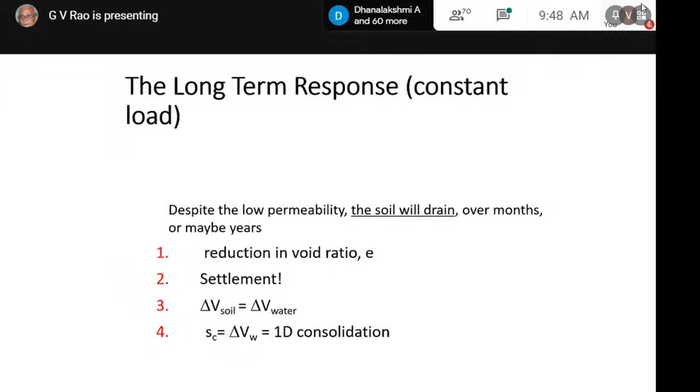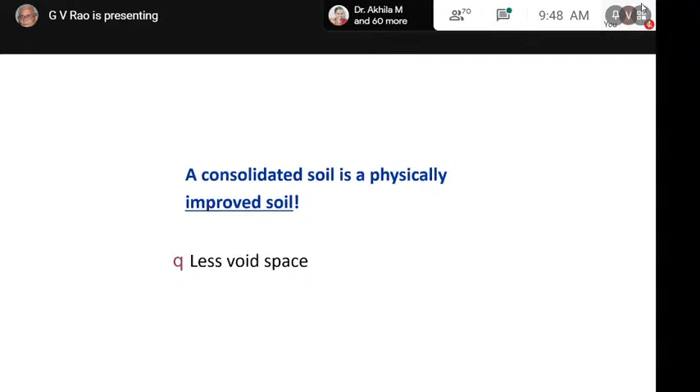So then, of course, we have already said that once consolidated, soil is better. Less void space, greater contact with soil particles, and then it's always stronger and stiffer. So if you look at that now, the epsilon value is the strain.

The strain which you are considering, that means the change in thickness, or the main thickness, or the total thickness, is going to be equal to the change in void ratio divided by 1 plus the initial void ratio. So what is this now? This is a strain condition, change in void ratio over 1 plus E naught. That E naught means initial void ratio. So what is the strain now?

The strain is equivalent to change in height, delta H by H. Or we can call it delta V by V.

So what we are going to get now, without getting into anything else, is just having the so-called void ratio with the pressure conditions. For the change expected in the consolidation pressure or overburden pressure, we just measure the change in void ratio and we can directly expect the change in height. That means delta H is going to be the change in height, meaning the settlement now. So we just need this basic equation only.

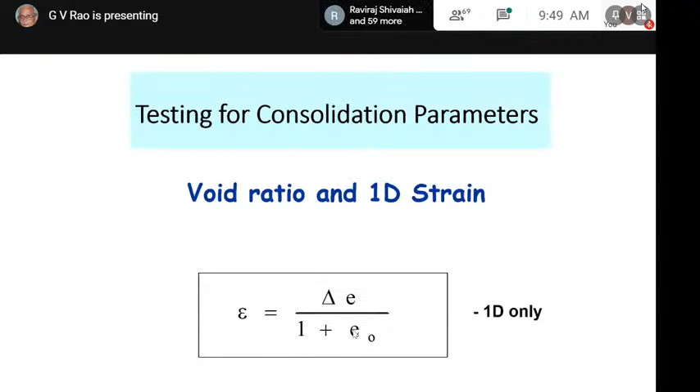Later we're going to express this in different terms like MV, AV, CC. They're all just ways of expressing this same relationship. And it also looks at changes in this E-log P curve or E-P curve we are going to consider. So as long as it's a straight line, basically this is going to be simple. And in fact it takes care of many issues. I'll come back to this at the end of the presentation, not today but the next presentation, to see how important it is.

So what are we going to do? We are going to pick up a soil sample, place it in a consolidometer ring, and we have drainage media - that means we have a porous stone, and between these two we put a filter paper. Then we start loading, basically after filling the entire thing with the container, and after saturating the porous stones also, we assemble it in a consolidometer gang, where a number of specimens can be tested, and the point is we are trying to apply a load and measure the displacement.

Earlier we used to measure by dial gauges. Today we have a lot of LVDTs, because they automatically give you the readings - you don't have to stand there, start a stopwatch, and things like this. So through LVDT we can automatically get a continuous measure of this now.

So in trying to do this test, we are not going to describe the whole test now. What are we really going to do? Apply a load, or apply a pressure, apply stress on the specimen, and measure the change in thickness by the so-called displacement measuring device with respect to time.

So when there's no more change, that means the end of consolidation for that load, and we're going to apply the next increment of load. So there's a load increment happening now, and also there's a time lapse we're going to have. You apply a load, and we know that once you apply a load on this...

There is excess pore water pressure generation. And slowly, depending on the thickness of this, depending upon the drainage zones on both top and bottom, it takes time for consolidation to occur, or for the excess pore pressure to be dissipated. That is a question of time and phenomena, and that is what we are going to note in the laboratory by actual measurement.

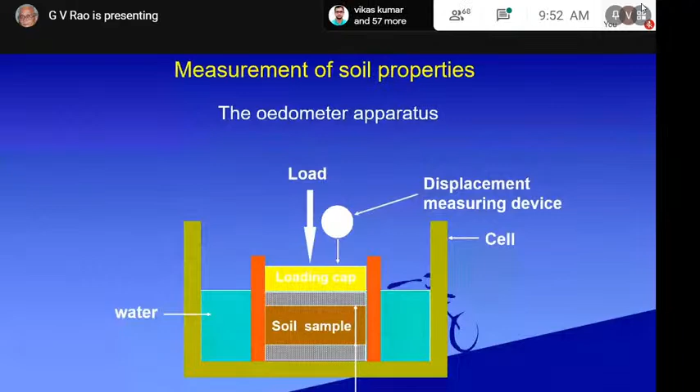Now there are many ways of trying to do it. It's not only always loading and unloading. There are better methods of finding out other behavior. So what is it we are going to get? We are going to get these charts in many different ways.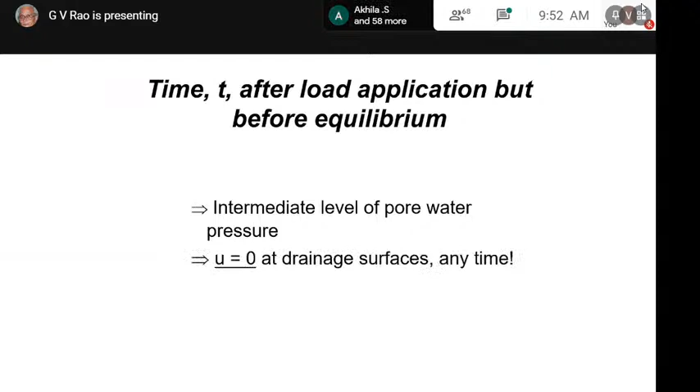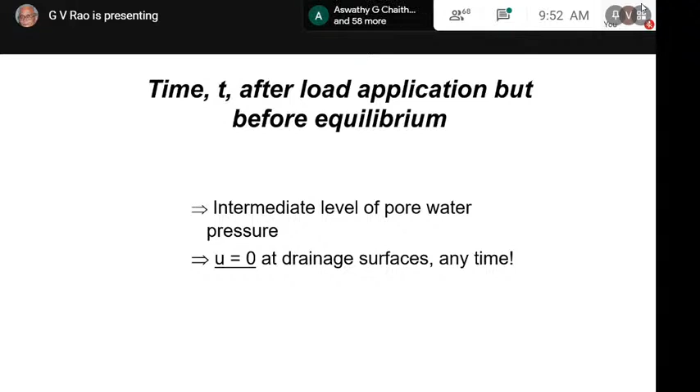So what we are going to do is think about what is happening in the middle of this pore pressure business. At the intermediate level, it is still going to have some excess pore pressure, and at the end of that load increment, the pore pressure is going to be zero, and this is going to be there from beginning to end at the drainage surfaces anytime, because near the top and bottom of the sample, we have a filter paper and porous stones. So the pore pressure may be instantaneously developed, but it will also instantaneously become zero at the drainage surfaces.

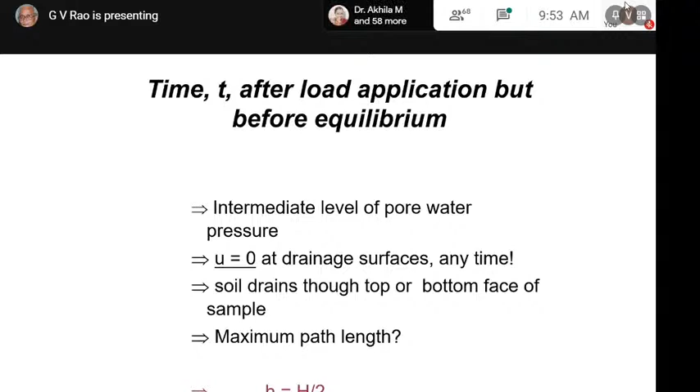So then water drains from the middle of the specimen to the top or bottom, and naturally we are concerned about that path from the middle of the specimen to the top or bottom. If there are porous stones on both sides, imagine a case wherein there are no porous stones on one side, so the path of movement is going to be the entire depth of the specimen, the entire thickness of the specimen, so the path length is going to be the full value of thickness. If there are porous stones on both sides, it's going to be half the thickness.

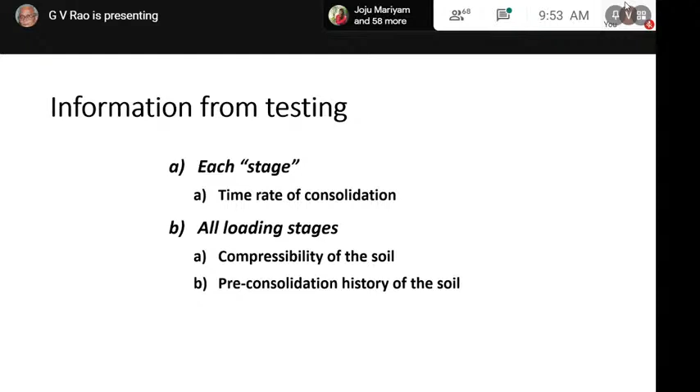So for each stage I mentioned, there is a time rate of consolidation. At all loading stages, if you take the values, we get the so-called compressibility of the soil. We also know the consolidation history of this, what happened, the stress history of this. And if the stress history is not known to us earlier, we should look for whether there was any pre-consolidation. So that is also what we are going to get out of this system.

And then, there are cases when we are going to construct the foundation or take a specimen. What are we going to do? We are going to take a specimen at 5 meters depth. We have to remove the soil of the top 5 meters, which means we are unloading the soil, and then we are taking a specimen. So once you take the specimen out, it was existing under an effective overburden pressure in the field of 5 meters, and now it became zero.

And now we are going to reload it. The same thing happened in the field also. When we construct a foundation, what's going to happen? Let us say if the foundation is going to be 2 meters depth, we are first going to remove the 2 meter thickness of soil. So we are going to remove that overburden. And if water is there, if the water level is high, naturally water is also going to come and fill this up.

And for example, there's a problem with the weather or a problem with the contractor, let us say he doesn't complete the contract. So what's going to happen? The soil, which is supposed to be at the foundation depth, is also going to heave, swell, and rebound, because earlier there was a 2 meter overburden. So now we remove the overburden, erosion happens, naturally whatever happens now, so the entire specimen is going to have a concave upwards kind of phenomenon.

So when you really start considering, after a few months or whenever the contract problem is solved, it is going to consolidate again. So that settlement we didn't consider earlier, because this consolidation occurs because of the rebound or swelling which happened since you didn't construct the foundation immediately after excavation.

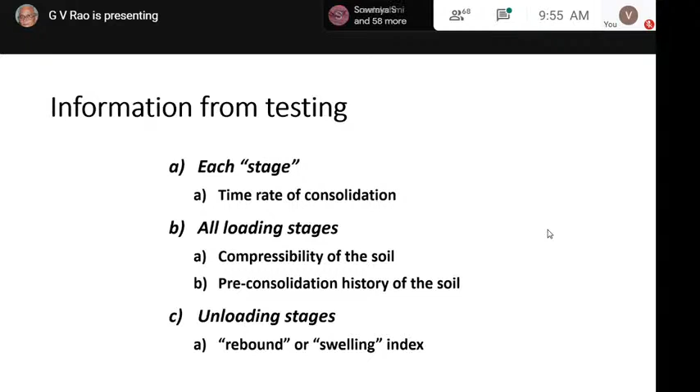Immediately after excavation, there could be some rebound, but you allowed this to happen, so the water slowly moved around, and naturally it gave a rebound. This is something we have to remember from a practicing point. In this case, we are going to get settlement much more than what we anticipated or calculated by the normal test. So that is something we have to keep in mind.

So then we are going to get two parameters I mentioned. One parameter is coming out not by the rate of loading, but by the rate of dissipation of pore pressure. We have a parameter called CV, coefficient of consolidation, and fundamentally the theory gives us that it is related to the permeability and the value of the compression behavior, also the parameter representing MV, and of course the unit weight of water.

We can get the value of CV by using a graph between the settlement or compression with the square root of time or log of time. This is again an empirical procedure. In fact, Sridharan himself has developed a new theory of plotting hyperbolic plots to get this value also. There is nothing scientific about this, but for most soils we follow a root-T method, and for some soils which are generally soft and consolidate more, subject to even secondary settlements, we use a log-time kind of procedure.

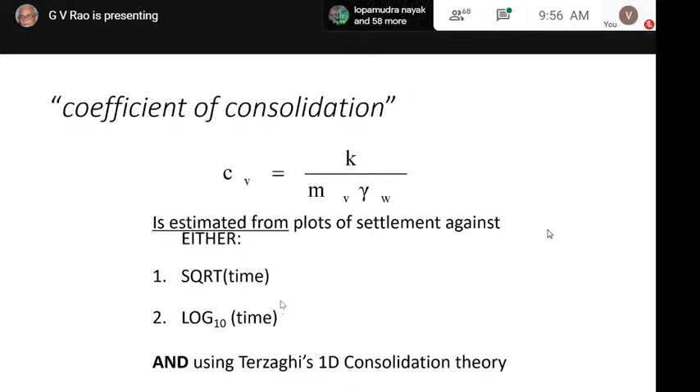So in these procedures, what are we trying to do? We are actually trying to plot the root of time on the horizontal axis, and the compression as observed by the dial gauge on the vertical axis. On that plot we can also plot the log of time, with compression on the other axis. From these curves that we get, represented by dots, we manipulate the data.

How do we manipulate it? Theoretically, we find that if you plot in this fashion, the theoretical line is going to be a straight line. By using this straight line, we can predict the time interval taken for 90% consolidation. That is what we are trying to do.

You know very well how to do this, and the master's students would know automatically that we extend the straight line portion and it cuts here into the ordinate. The difference between the initial reading and this extension of the straight line gives us the initial compression, and this point at which it cuts is 90% consolidation. At 90% consolidation we can find the value of T, capital T, and U, 90% U.

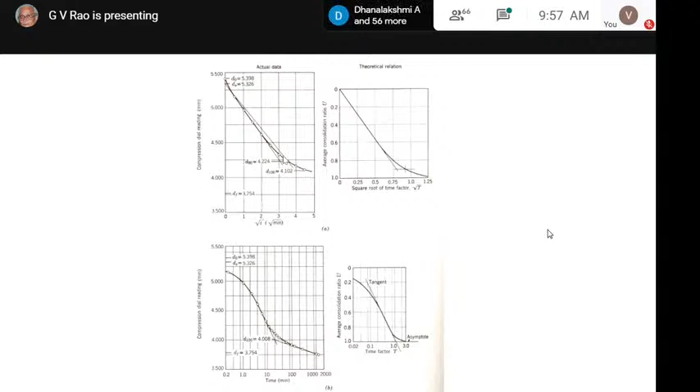From this, by manipulating appropriately, what are we trying to do? After this, we also draw a line which is 1.15 times the slope of this line, and wherever it cuts, we take this as T90, the actual time for 90% consolidation, which you use in the time factor equation given by Terzaghi, so that we can get the...